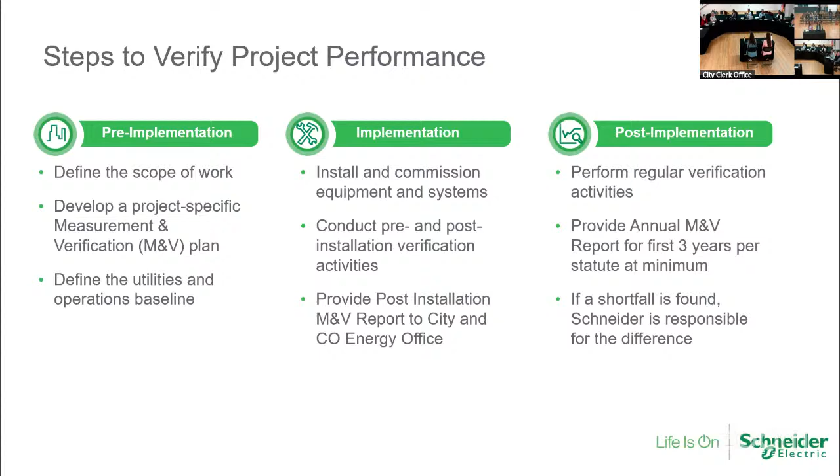And then the post-implementation, that's the longer term M&V. As we know, there are 3 years of statutory requirements through the state. So the first year, we typically make 2 visits to measure and verify what's happening. And then at the end of year 2 and year 3, you'll see us for 1 visit. And that's when, if a shortfall is found, then we would be responsible to help you make up the difference and also correct whatever issue caused that shortfall in the first place.

So there are lots of different reasons why we would measure and verify a project like this. Obviously, it is statutorily required, but that's not the only reason we do it. We want to make sure that we're sharing an appropriate amount of risk with you so that that creates a strong partnership and makes sure we're working in your best interest. We want to make sure your savings guarantees are met as designed.

And over time, it could also help us identify potentially additional savings in your facilities or in those systems to create further efficiencies, more savings, and also just help Roy and his team from a maintenance and operations perspective keep an eye on what's happening with those systems.

And we want to reduce those uncertainties to reasonable levels. I know there's a lot of uncertainty with who knows what's going to happen in 20 years, especially with recent events that have happened over the last week. It's hard to know even what's going to happen a couple months from now, but we do have some ways that we can reduce uncertainties with our measurement and verification so that you can have the confidence this project is going to pay for itself.

So when we're building a measurement and verification plan, we want to make sure there's, of course, an element of accuracy, but we want to balance it with the cost. There is a cost for us to do the measurement and verification, and there are other protocols that can be somewhat costly or just simply don't make sense for the scope. So we want to make sure we pick the appropriate one, and we'll go over what all those options are.

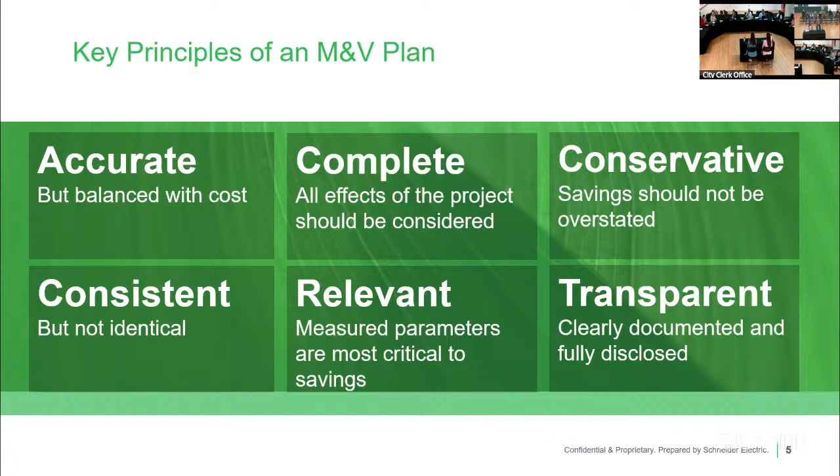So I won't go over all the statutory requirements. I believe I've covered these in previous meetings. If you have any questions, you are more than welcome to reach out to Charlie or Oren from the Energy Office. But we want to make sure that obviously the statutory requirements are covered.

So this language and all of the requirements are listed in your contract language. So we'll work with Denise and Jeff to make sure this meets statute. But we're going to be putting your M&V plan into the contract so we know exactly what's going to happen, at least for that statutory period of the first 3 years.

So looking at the timeline specifically for Manitou Springs, when would the measurement and verification theoretically kick in? So we're expecting that construction would be done by the end of this calendar year. So sometime starting early 2026, the construction would be complete. That's when we consider that the year 1 start. So as soon as everything is installed, we're going to be doing our baseline measurements and making sure everything was installed properly. We'll let that go for that first year and give you a couple visits and provide that report.

In 2027, that's when the year 1 reconciliation would happen if there were to be a shortfall, and then year 2 would begin, and so on and so forth.

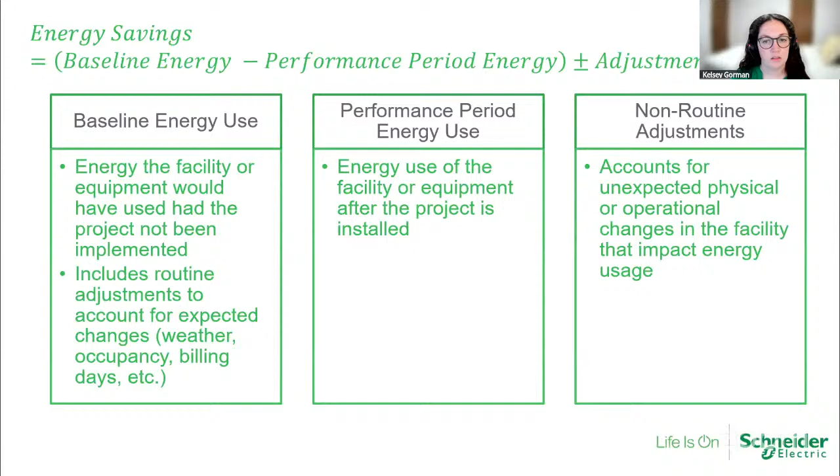Another part of this project is a little different in how we measure, and that's the water revenue generation. Since the water usage itself is not being impacted, we're not going to use the same equation as the last slide. We're only impacting the accuracy that the meters are reading.

We're not measuring individual use of water like longer showers, shorter showers, gardening, etc. The way we calculate the revenue increase is by taking the baseline gallons of water consumed by the city and holding that steady, because we don't want anything influencing our calculations except what we did, which is increase the accuracy. We apply that baseline water use and ask: if you'd had the more accurate meters we installed, what revenue could you have been generating? Then you subtract the actual revenue generated with the old meters, and the difference is your revenue generation.

The International Performance Measurement and Verification Protocol, abbreviated IPMVP, is the gold standard when it comes to measurement and verification. I'd venture to say all ESCOs use it because it's just the standard for measuring and verifying everything. The Colorado Energy Office is also going to require anyone doing M&V or an energy project with you to use it.

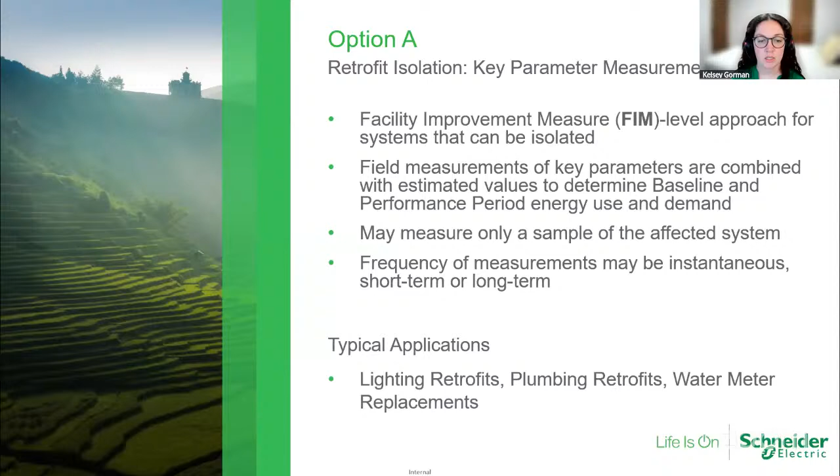Thank you. I'll say one thing about the warranty - I apologize that information was not readily available at the last council meeting, so I made sure that was included in the packet this time. And I pulled out the two most important pieces of information as supplemental slides for your reference.

So the manufacturer does guarantee an accuracy of plus or minus 1.5% for the full 20-year useful life cycle of their meters. So we're pretty confident that it's going to stay within that range. And if it doesn't, then you do have recourse with the manufacturer under warranty to get that corrected.

The advantages of option A, I've kind of discussed those already. It's very cost effective. It's great for scope that is not going to be influenced by other things, like lighting — the heating and air conditioning in your building will have a very minimal effect on it. So we can safely isolate it from the other energy users in your buildings and measure it with option A.

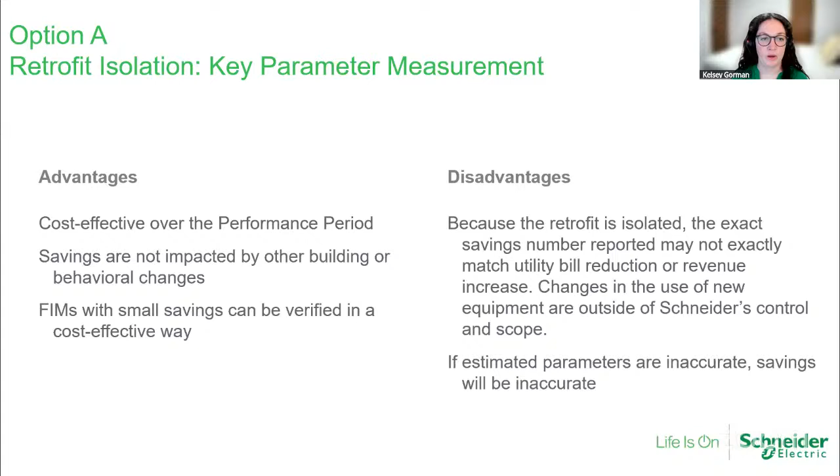Yes, so that would just mean that we're measuring only the retrofit, or facility improvement measure, or scope of work. I'm sorry I'm using so many words to say the same thing, but we're only looking at that one scope that we're implementing — that's what retrofit isolation refers to. The key parameter measurement part is what you mentioned about taking a random sample of measurement.

So retrofit isolation means, for example, we're installing HVAC, windows, and lighting in this room. If that were the case, then we would not be looking at other renovations you would be making in this area. We're only isolating our savings to the scope that we are installing. Does that make more sense?

How does that affect the rest of the project, like the water meters? Is that included? Yes.

You test a few of them? We can talk more in a moment about how we go about our testing and verification upon install, but we're going to be verifying every water meter as we're installing it, and then post-install creating a report showing the accuracy, making sure it's actually working, and providing that documentation to the city. Thank you. You're welcome.

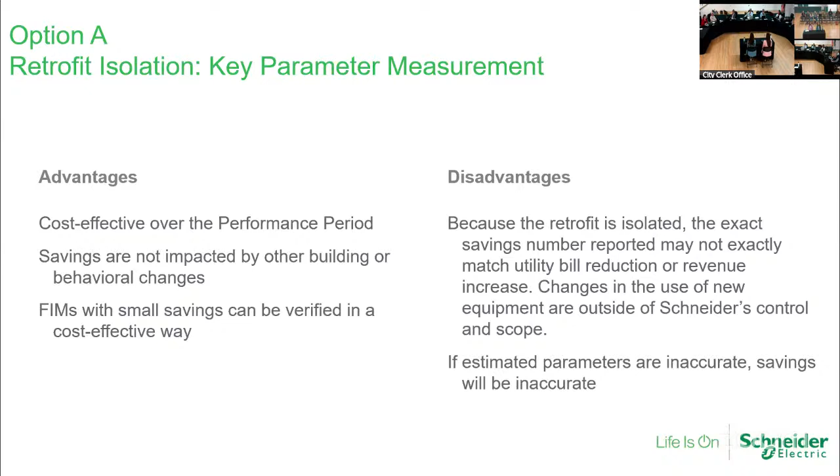So when looking at the scope of work for this project, I try each one on with a different option and think about: is it a good fit, is it not a good fit, and why? I wanted to lay that out clearly for everyone. We'll go scope by scope — I'm not going to do this for every option, don't worry, I know this is a bit lengthy. There are supplemental slides in this packet where you can look at my reasoning for the other options, but I wanted to spend more time on option A since that is what we're recommending.

Lighting is a great fit. If you read the IPMVP, if you're looking for some light reading, it actually recommends option A for lighting as the standard approach, because it makes sense almost all of the time. So that would be a perfect fit here. Now, whether or not the savings are large enough to justify this approach, we'll have to weigh that, because the savings are pretty small compared to what it would cost to measure and verify them.

That's something else that needs to be considered: are the savings going to be smaller than what you're going to pay for us to measure them? Does that make sense? Typically, no, it does not. But if you look at lighting as a general scope item, option A is a good fit. Lighting energy use remains steady — it's not influenced by the seasons. The lights go on and they use a certain wattage; they go off and they quit using wattage.

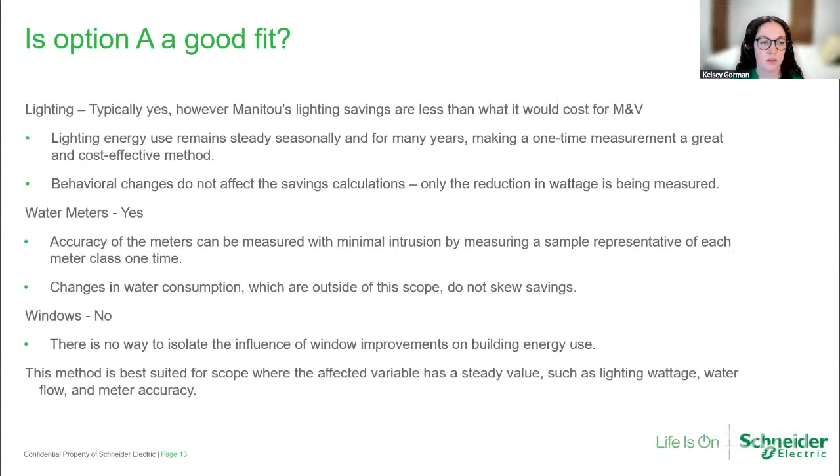Then we would apply a contract utility rate to that, so that, as has been mentioned before, if you change your rates, if you get a different utility rate, that's not something that we're influencing, and so that's not something that we want to unfairly measure. So we're going to stipulate a utility rate to be used, and that will all be in the contract. That will all be approved by the Colorado Energy Office as well.

And we do have projected utility rates from Colorado Springs Utilities for the next 5 years. So we actually took an even more conservative baseline than those new utility rates that are going to come into play for the next 5 years.

For the option A water meters calculation, it's a little bit more complicated than just one minus the other. So in general, we'll measure the accuracy of the existing meters - that's already been done. That's what we based our calculations on, and that's why we can be so sure of our projections of how your savings are going to look.

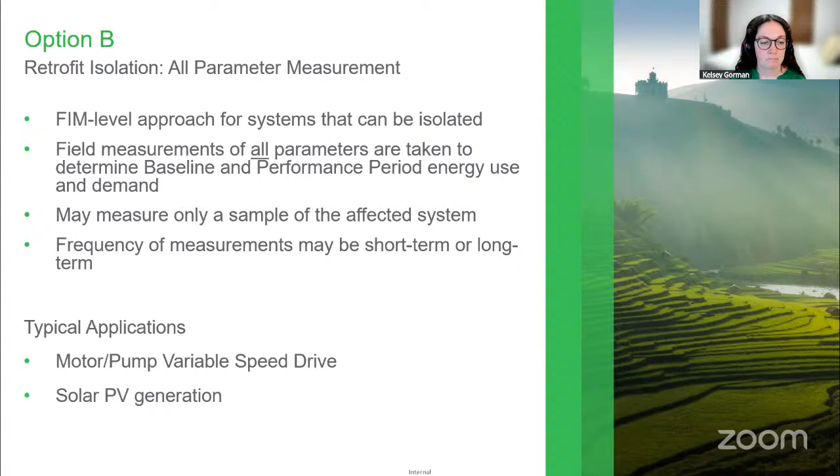So when I think option B, immediately my mind goes to solar generation or motor upgrades like in your fans. Option B, I would say, is not a good fit here. Great fit elsewhere, not here. For the lighting, I don't know if you'd need to rewire all of your electric, but it would cost so much to measure this that it would not be worth doing the project. This would really not be a good use of money to use option B for lighting.

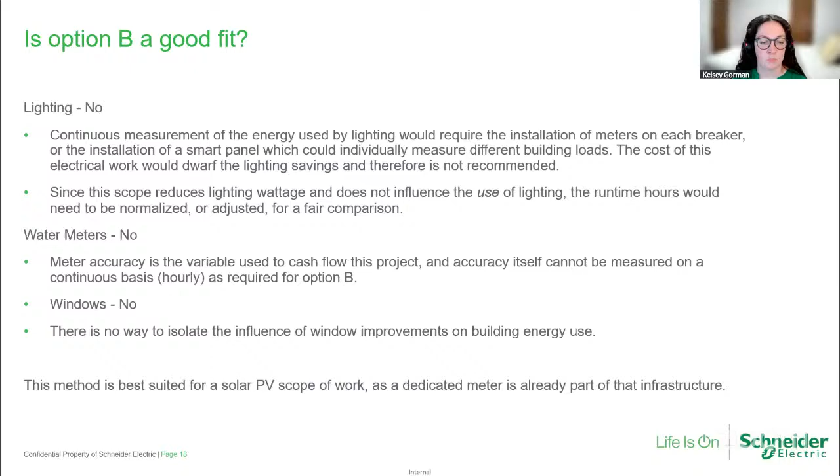Also, I've personally never seen it done. It's not good industry standard practice. It does require full energy metering instead of just measuring that one impacted parameter. So not great for lighting. Same for water meters—you can't measure accuracy like that. The meter has to be physically tested at a facility, so it can't be measured continuously. And then for windows, same point as with option A—there's not really a way to isolate the energy saved by upgrading your windows, because they're not drawing power from an outlet. So it's a bit more complex than that. This method is best for PV, which already comes with its own meter and it's kind of plug and play.

All right, if there are no more questions, I'll keep rolling on to option C.

So option C is probably what you would first think of when you ask yourself, how am I going to measure the energy impact from Schneider Electric? If I had to do that by myself, what would be my first thought? At least for me, my first thought would be, well, let me look at my utility bills before the project and then after the project. That's pretty much what option C does. It's looking at your whole facility at the utility meter level, looking at everything that's going on in your facility.

This approach is great if you've got multiple scopes of work or facility improvement measures, especially things that are going to change seasonally, like building automation that controls your temperature set points and the schedules your building is running, or that in conjunction with lighting, mechanical, and windows. If you had a bunch of stuff going on and it saved a large amount, then this would be the option to use.

So savings, we typically look for savings that are at least 10% of the baseline, and this allows us to know that what we're seeing on the utility bill has got to be from the work that we did. It's not just noise or small things going on in your facilities that are unrelated to us. It helps us be certain that what we're seeing is the scope that we implemented.

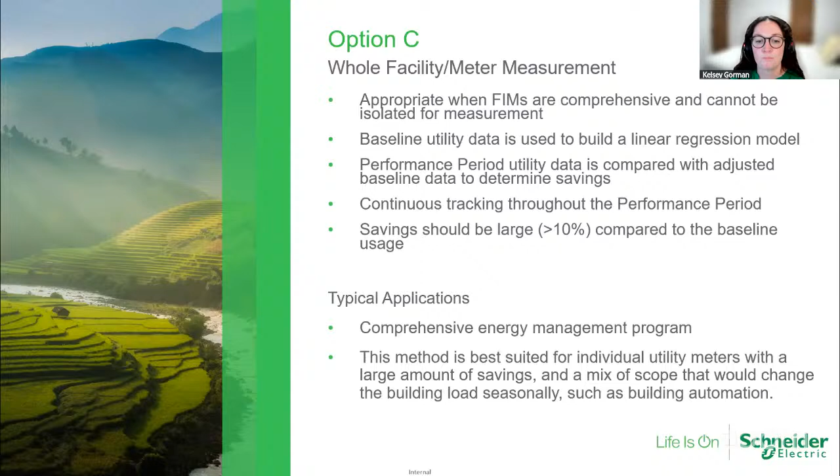As mentioned, there are supplementary slides later on where you can see why I would say that option C is not the choice here. Number one, savings just aren't large enough for the energy efficiency side. And number two, it requires continuous measurement, which, as mentioned, is not possible for accuracy.

All right, option D, this would be a calibrated simulation. This would be if you put option C into a computer model, you can think of it that way. So we're also looking at a whole building, multiple scopes of work, all interacting with each other, changing seasonally, but we're doing it in a model instead of analyzing the utility bills and doing all the math behind the baseline to get it steady with the conditions of today. So this can be a more cost-effective way if you wanted to do option C and you had the scope and savings that could justify it.

This can also work for buildings that don't have a baseline. That's not really relevant here, but it's just a different way for if you really want to measure something and nothing else will really fit. Can be kind of a workaround. So it's best suited for meters that we would just love to use option C for, but that don't have quite enough savings to justify that.

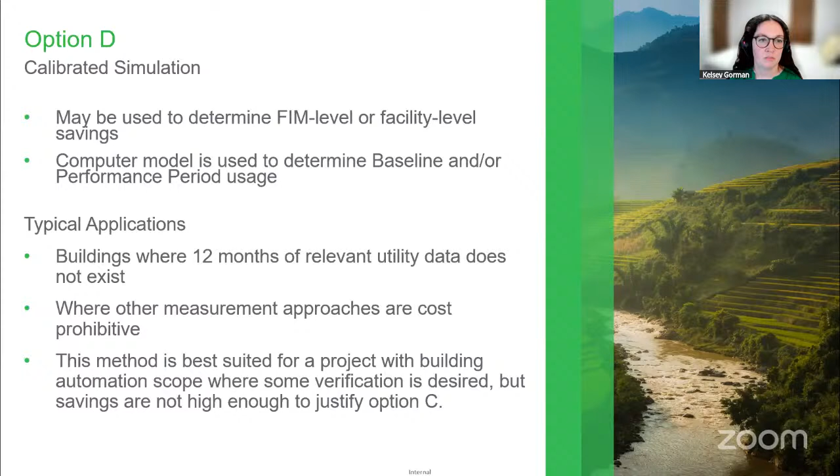Okay, so the proposed M&V plan that we have put together for you, we did evaluate lighting to see if option A would make sense, but overall the lighting savings annually came in about $3,800 or $3,900 a year. It's fairly minimal in the grand scheme of the entire project. So we thought rather than eating up your minimal lighting savings with additional work and reporting on our side, we'll just let you keep those in your pocket. We're pretty confident, I mean, LED lights are fairly simple and they're really efficient compared to what you have here. So we're pretty confident you're still going to get those savings, but we would not recommend that we add these to our measurement and verification plan just due to the cost and resources required.

For windows, we talked about how it's hard to measure the energy impact of those. We do know it will help with comfort and it will eventually help with things like energy efficiency, not letting hot air leak outside into the cold. So we're not going to measure the window impact necessarily, but we do expect that you're going to see some benefits from those.

For HVAC, we're actually adding an air conditioning and heating unit where it didn't exist before. So that actually negatively affects the energy savings impact of this project, and we certainly don't want to take any savings away from you. So just know that if we do put the HVAC unit in here, you have air conditioning where it doesn't exist now. Your utility bill may be a little bit higher in the hotter summer months, but this is also a benefit for being able to rent this space out year round and have everybody be more comfortable. So we wouldn't be measuring that necessarily.

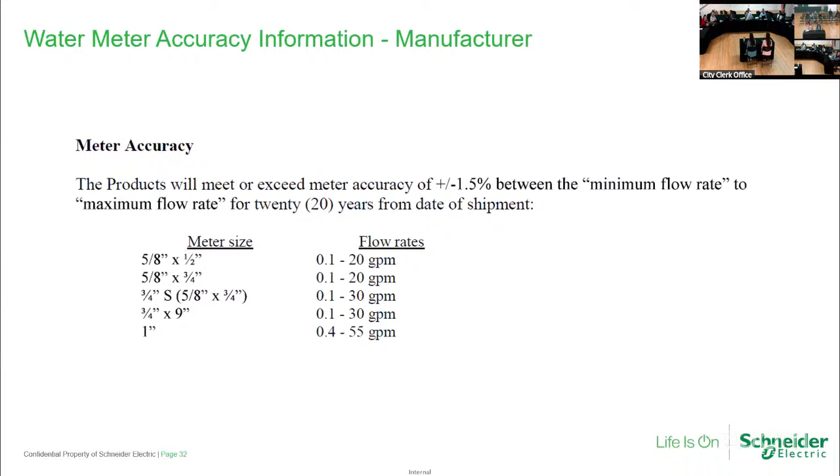But it is the cost to the city. The city must remove the defective device, even though it's defective on the manufacturer's side, and the city must pay for removing the defective device and also installing a new one. So does Schneider take into account those costs that we bear for having to pull out and install a defective device in our overall cost savings?

No, we do not account for that. Okay, so that's just a cost the city bears with going with this. Of course. But, you know, after the initial installation, especially that first year, we're going to be doing a deep dive on everything during our first year of measurement and verification. We'll be able to tell very quickly if a meter's not operating properly, and we'll be able to assist the city with that warranty claim.

However, the labor would be on the city water department to do that change out. What I'm requesting of the city, if that does occur, I want to know what that cost is. I want to know if we have to pull out and replace a meter, I want to know how much that costs. Right now you're saying it costs $12,000 a year to maintain the system as a whole, so I'll be curious to see how we factor that into our overall savings. Thank you.

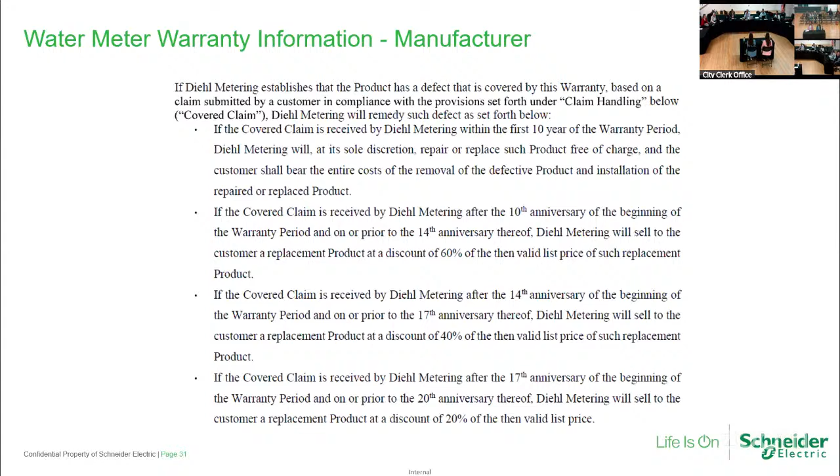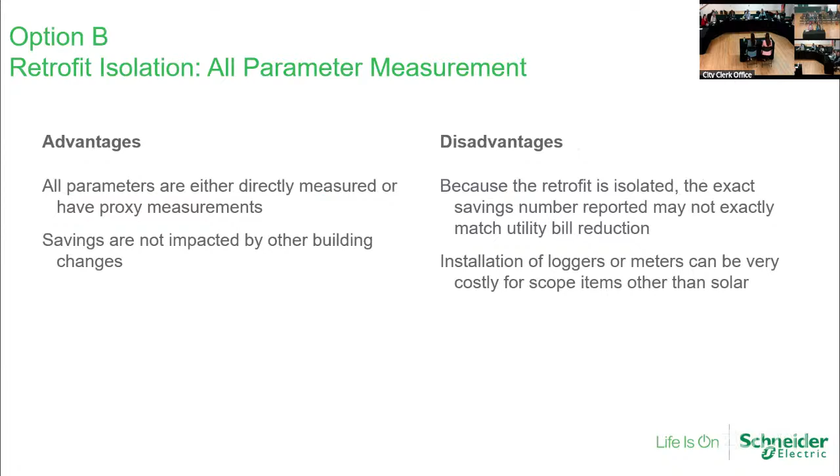Julie? Can you explain, under maintenance and operating savings, under the proposed M&V plan for Manitou, the responsibilities section says that we would have to come to a mutual agreement on M&O savings, usually 3% of construction cost. Can you explain that?

Yes, so as of now, and Tyler correct me if I'm wrong, we've included $10,000 of annual maintenance and operational savings in your cash flow. And again, there's $12,000 a year being spent just on parts and materials to replace failed meters, so we've taken a very conservative approach to that. Typically the industry standard is 3% of the total cost of construction, but we felt that was a bit inflated for Manitou Springs, so we kept it much more conservative. That can also include things like fuel cost savings by not having a water meter employee driving around to pick up meter reads every month, and the wear and tear on those vehicles. We won't necessarily need to do that anymore, so that's a maintenance and operating cost savings.

So we save $10,000 and how much do we pay you? The $10,000 in savings from maintenance and operations savings is essentially costs that you're avoiding in the future by having a working system, so you don't pay us anything extra for that. That's just a cost savings we include, like the energy savings from the lights and the additional revenue from the more accurate meters. So when it says come to mutual agreement on M&O savings, usually 3%, those are just your estimated savings the city would save on all of these projects, nothing to do with a payment to your business. Is that correct?

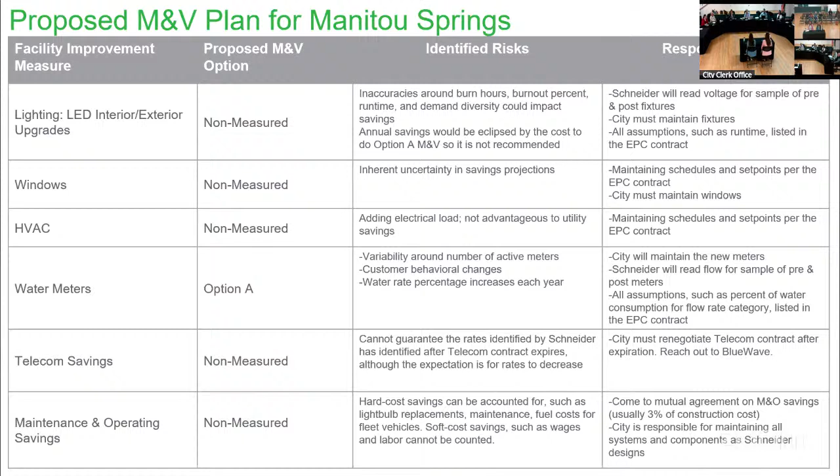Our next item is a presentation and discussion on improvement options for the Ruxton Corridor.

This is an update from February 11th. We had a work session then, and so tonight we have Glenn Ellis from JR Engineering, who's going to brief us on this.

Mayor, I'll do a quick introduction. As you know, we presented this about a month and a half ago, and you had several questions. We wanted to bring those answers back. Glenn has been our engineer on this project since the beginning, so he and I met, he watched your presentation, listened to the questions, and has some additional information. One thing you asked for was the itemized cost of each of the options, so we were able to provide that for you. Glenn did some estimating for that. So with that, I'll turn it over to Glenn.

Thank you, Denise. Can you hear me pretty good? Yes. Generally, if you're about 3 inches from the microphone, that works pretty well.

As Denise said, I'm Glenn Ellis with JR Engineering. I've been the project manager for this project probably 4 or 5 years now, back when Dole was working with the city, so don't hold that against me since I've been on this almost from the beginning of design. But as has been stated in the past, there's a lot that has gone into this project, a lot of complexities, lots of things to think about and discuss.

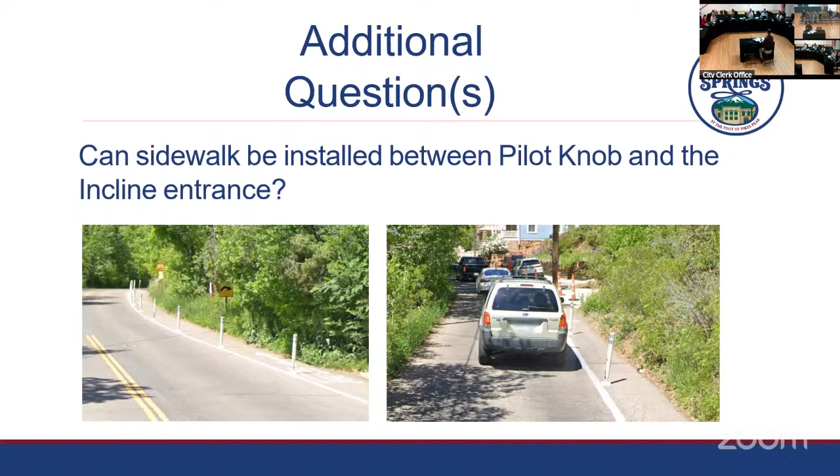Then on the section on the right, which is the one-way, that roadway is very narrow, about 17 or 18 feet wide. The plan indicates there would be a colored section of concrete to delineate the roadway from the sidewalk, and then there would be a 5.5-foot sidewalk. It would have no curb and gutter because of the fire requirements.

You need to have an unobstructed area of at least 20 feet. That allows if there's a fire truck operating on the side of the road at a fire hydrant or whatever, there's still a passable area adjacent to it. So obviously we're restricted currently as it stands, but adding that curb and gutter in that section would restrict that area even more. The plan, even from when this corridor was studied many years ago, that exhibit I show comes directly out of that plan, and that's really the plan we would be moving forward with.

It's a narrower sidewalk, but you'd still have a little bit of room if people wanted to get on the colored area. But that colored area is really delineated from the roadway. So I've indicated there with some lengths and whatnot.

The sidewalk itself on that section would also have to be thicker than standard sidewalk thickness. Standard is 4 inches; this would be 6 inches. That's just because you'd have vehicle traffic, potentially the fire truck driving on it, and you wouldn't want it to be thinner and potentially break up.

So with those costs and those dimensions, I've got an estimate of just under 200,000 to do that. You'd be removing the asphalt, and you'd remove some curb and gutter and sidewalk that's on the south side near Pilot Knob.

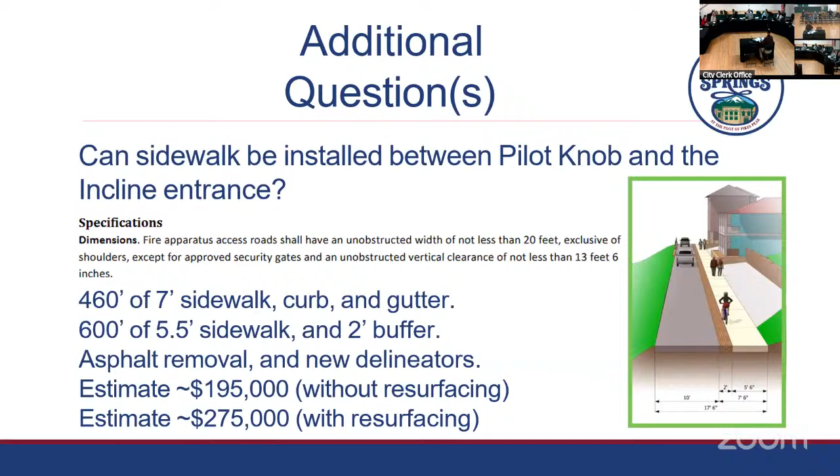Now, when it went out to RFP for engineering, Dole had put the western terminus at the bar, at the hydro plant, the access to the bar parking lot. That was his interpretation of the COG. It could be interpreted as stopping short of the COG, but that's the road he took.

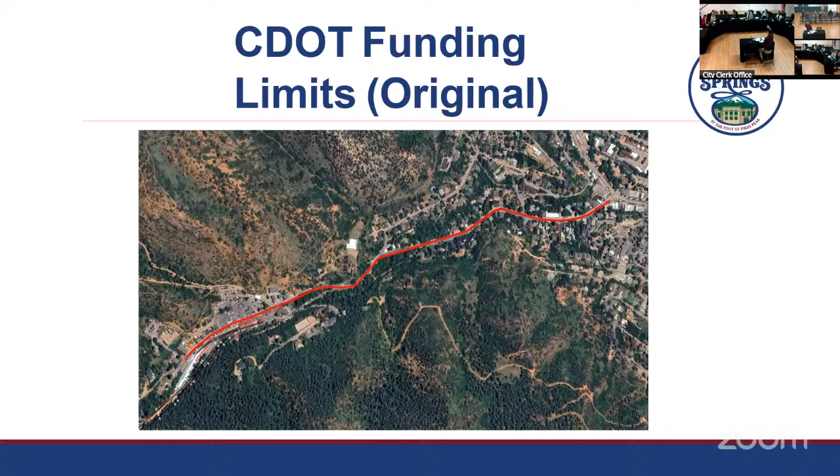So when we prepared our proposal and cost estimate, those were the limits we worked from. We did enter into a contract with the city to provide preliminary design from Manitou Avenue up into the hydro plant. Right now, based on some adjustments and direction we were provided, the scope changed to only provide design from Hydro Street to New York Avenue, to align with CSU, which was already in the process of designing the undergrounding from Hydro to New York to kind of align with the COG's improvements that they had made.

So that was the revised scope. Currently we have 50% design ready to go to CDOT for review, which includes new curb, gutter, and sidewalk, new water, new sanitary, and a new storm sewer system, new asphalt paving. The difference between this new asphalt paving and the other asphalt paving in the other estimates is this pavement would rip out all the existing, go down to the subgrade, recompact and stabilize the existing subgrade, and then put new asphalt paving on it, underground all the electrical, and add street lighting. Our current estimate at this point is $8.25 million.

As you see in that table, discussed last time around, the city received 4.4 million of federal funding with a city match of 917, so 5.3 million is available for the entire corridor. As you can see there in yellow, you have currently about 4.8 million remaining for design and construction of the project. So I just kind of want to give a little background on that.

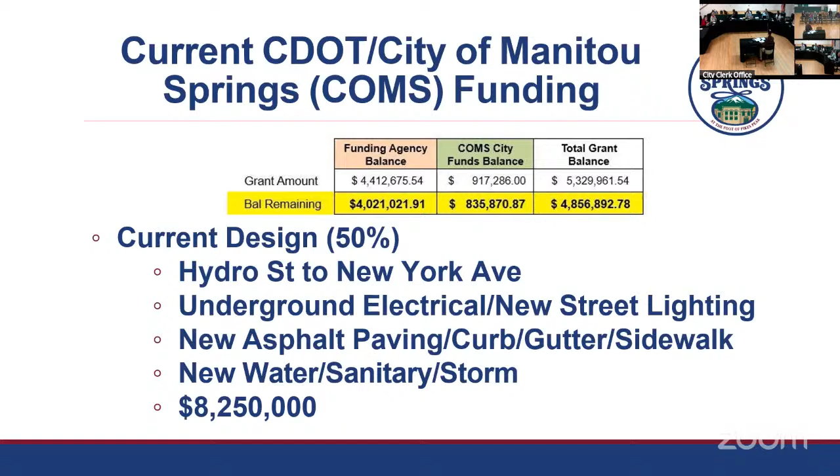Okay, so now I'm going to go into the options. I know you've already heard options A through D on the prior presentation, but you have those same options here plus a couple other ones. The A through D are the same as what Andrew presented. I'm going to go through them, maybe provide a little additional information, but nothing has really changed in terms of the limits, the work being done.

You will recognize that there are differences in the cost, and I can give an overview of that, but Glenn, I think it would be helpful just to touch briefly on those first four options, the ones that Andrew had already presented, because I think we'd benefit from a refresher. And then if we have gaps, we'll ask questions.

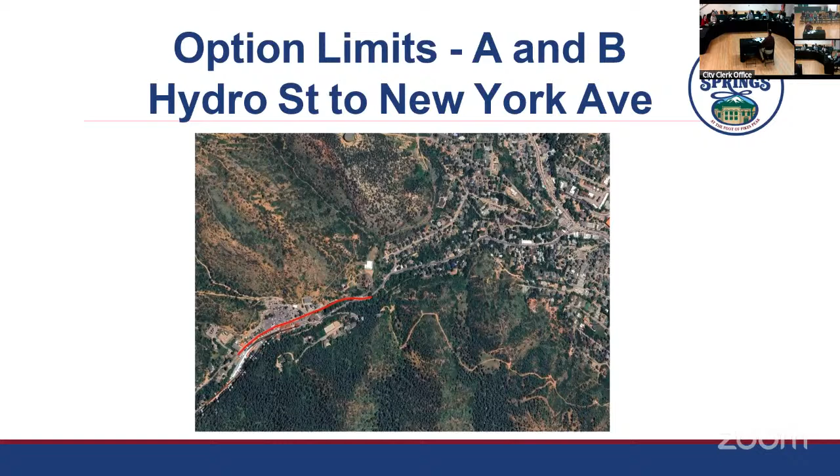That project for option A, from New York Avenue to Hydro Street, would be to underground the electrical and the telecom. We would do a mill and overlay, so that's just removing maybe 2 inches of asphalt, putting 2 inches of asphalt back, structurally lining the sanitary sewer system, and adding some walkability enhancements, really just signage and replacing some of those delineators out there.

Adding new streetlights that would be coming with the undergrounding. There would not be any water or any storm sewer improvements at all. You'll see in some of the other slides that there are some of those, but I wanted to highlight that there's none of those on there. So with the city's aging system, those improvements would not be made.

So there's the potential that a year after, or even 2 months after the project, you could have a water main break or something like that, just to highlight that. And so that's estimated at 4.9 million. So because we pulled out the water, we pulled out the storm sewer, we modified the asphalt work, it brought the cost from the original 8 point whatever million that we had currently estimated down to 4.9 million.

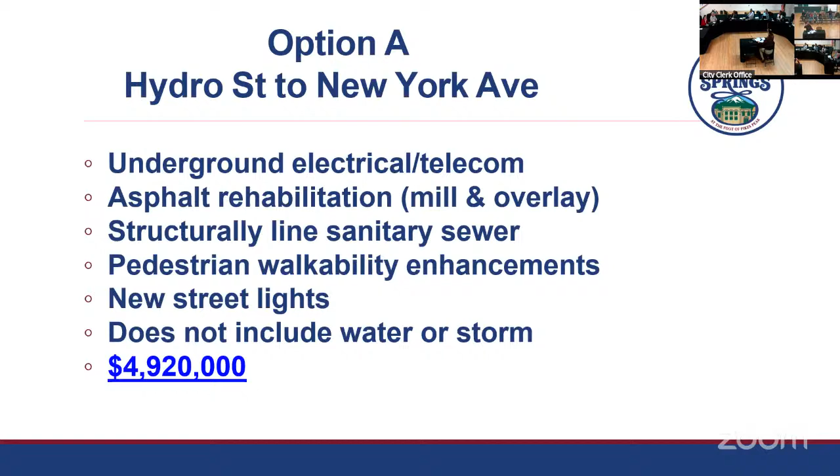And then, so I generated some pros and cons, and obviously there could be some others just based on perspective and in the context of the improvements. But obviously the pros, you're getting your underground conversion, which I know is a high priority for the city. You have an upgraded sanitary system, you get new street lighting, new pavement surface, and it fits right within the existing budget. I mean, it squeaks right under there.

The cons are that it only provides a benefit for that COG in the incline area. The remainder of the corridor remains as is, so there's no improvements east of New York Avenue. There's no new storm or water systems installed. We would have to revise some of our design that's already been done to remove some of the elements we designed in there, such as the water, the sewer, the curb and gutter and all that. We'd have to pull that out of the design and tie everything back into the existing grades that are out there currently.

So those are a quick overview of the pros and cons. And like I said, I touched on the cost. Your packet should have the actual cost estimate of how I've developed those costs. If there's any questions on the cost or any of those elements, I'm open at this time for option A.

Any questions on option A?

I'm just assuming that all of these cost estimates are pre-tariff. I mean, this could really change. Yeah, I haven't been involved yet with projects that have actually gone to bid. It's a short period, so yeah, it's hard to decipher what that factor could be.

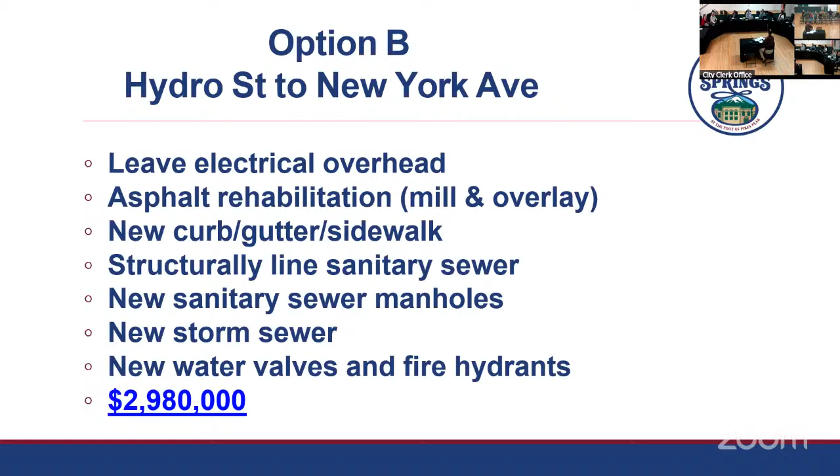So jumping into the pros and cons, I mean, a lot of these are going to be the same throughout all these options. You've got your upgraded sanitary sewer, you have new water valves, new hydrants, you have new pavement surface, new curb, gutter and sidewalk, and new storm sewer system.

And this one clearly fits within the budget. The cons obviously though are you're only benefiting a select area. The remainder of the corridor is left as is. The poles remain, although there may be the possibility as we're going through design of looking at each one of those poles individually and saying, hey, can we move this one out of the way so that we can get our sidewalk or whatever improvement in there? There would be a cost associated with that, but we'd have to work through that.

Right now it's really a concept that hasn't been vetted through or discussed too deeply with CSU. We would have to revise our existing design again, and there's no new water main. So it really depends on your priorities—some of these cons may not really matter that much. If you want a new water main, then it would be a con. If you're okay with what you've got, then it may not score that highly on that con list.

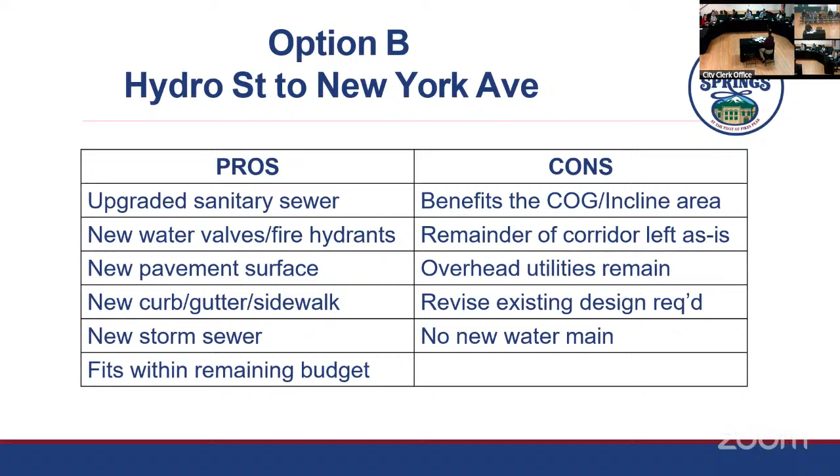Any questions on B? Anything else? Okay.

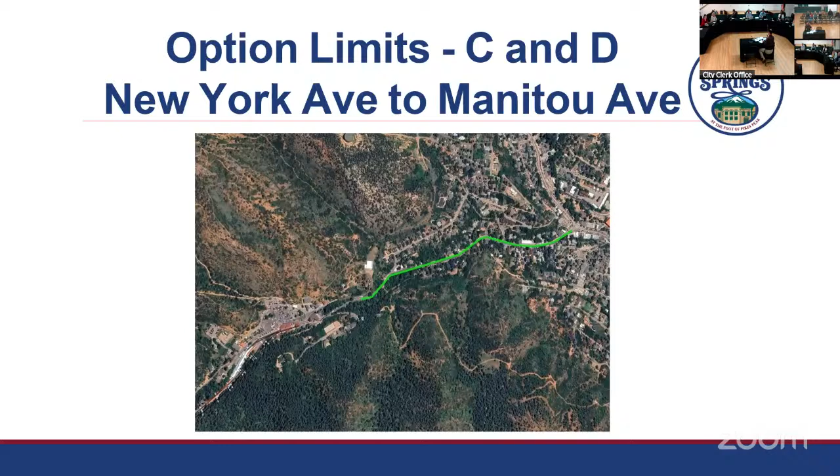Options C and D are from New York Avenue to Manitou Avenue, and that really just closes the corridor limits. They're listed again as C and D just because one's got the undergrounding and one doesn't. Option C, we're kind of flipping this way—we're leaving the overhead along the entire corridor. We're milling and overlaying, and we're adding curb, gutter, and sidewalk.

We're doing the sanitary sewer lining again, and replacing the sanitary manholes. This time we're leaving the storm sewer system in place, but only replacing the inlets—those have deteriorated over time, so we're going to replace those. And then at selected locations, we would add water valves and fire hydrants. That cost is coming in at about $4.4 million.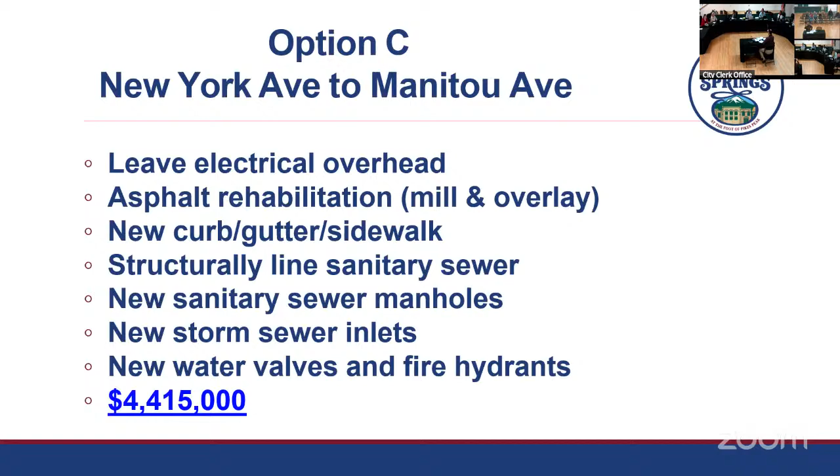Pros and cons: you get an upgraded sanitary system, new water valves, fire hydrants, new pavement, curb, gutter, sidewalk, new inlets, and new manholes, benefiting a good majority of the corridor. The cons are you still have the poles in the way that we'd have to work around, and you would need additional funding—which I think might be left over, because I went through multiple iterations on these cost estimates, so I just didn't update that con.

So the 4.4 million does fit within your current budget, so we can strike that actually. We would have to do design—no design has been done yet on this segment at all, and you would not get a new water or storm system through that corridor.

Any questions on C? So that includes that raised sidewalk from Pilot Knob up to New York. Yes. Okay, thank you.

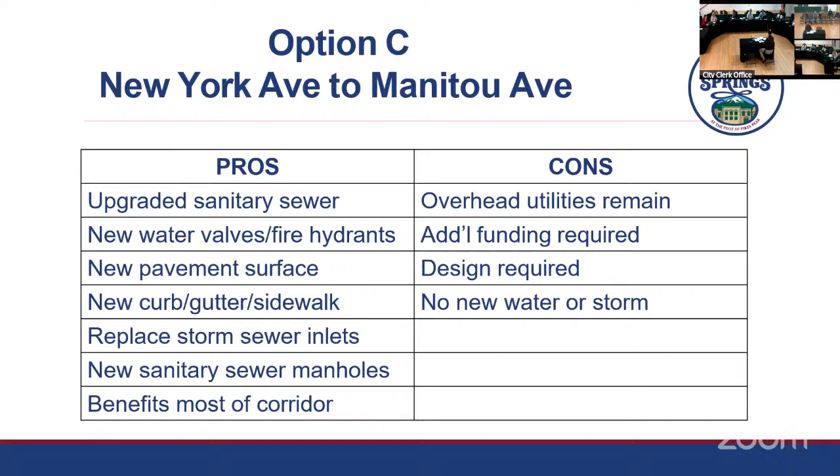D is undergrounding the entire corridor from New York Avenue to Manitou Avenue. Andrew had about 4 to 5 million for the undergrounding of the electrical, so I kind of split the difference and put it at 4.5. I added about $1 million for the telecom, and really that's just my best guess. We'd have to have some conversations with those companies—I'm sure they do budgetary estimating and should be able to provide a cost, but we just didn't get into that at this time.

And I've got 2.5 million to do the secondary connections and the easements, associated with a maximum of 100 properties out there. I tried to tally it, but there's wires that go everywhere, so you really can't follow every one of them. There could be a wire that goes 2 properties deep—I really don't know. That's without really working with CSU and doing an analysis of every single property, walking it and looking at the needs.

The one key on this, and I had to get confirmation with CDOT, was there was talk last time about using funds just for the undergrounding as the priority. But because of the funding source, we could not use this money solely for undergrounding—it has to be associated with a surface improvement. So if you're replacing the sidewalk and the pole's in the way, the pole can go underground and the project will pay for it. But if you're milling and overlaying and not touching anything that would impact the poles, then it would not qualify.

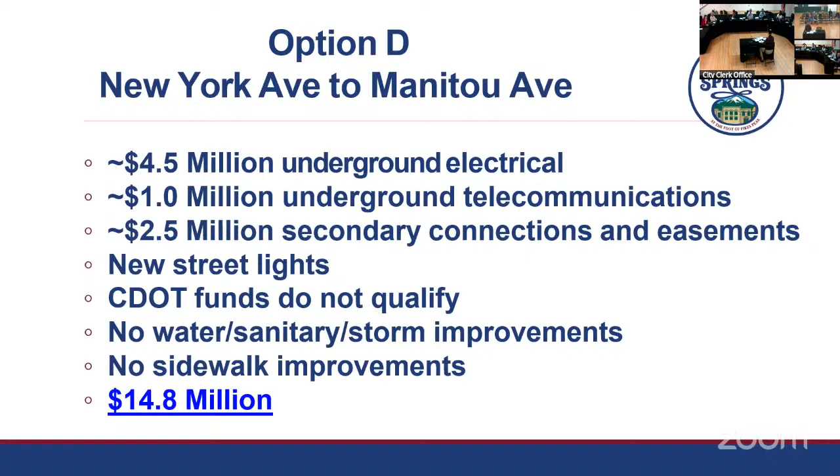The pros and cons on this one are: the pros are you're undergrounding, you get new streetlights, and it benefits most of the corridor up to New York Avenue. The cons are there's no other improvements being made, and you can't use CDOT money to fund it.

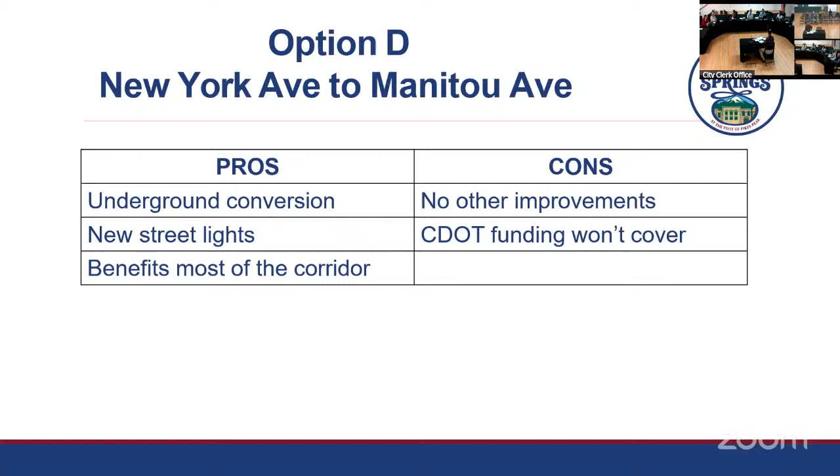All right, if there's no questions on that, I'll jump in. The next 2 options are really... sure, Julie, go ahead. That's fine. Go ahead. This, I just don't know.

If you're replacing a sidewalk and installing the gutters, does that mean you have to also do an asphalt resurface? No, you don't have to.

And if we just replace the sidewalk, is that something that would give us CDOT money without resurfacing? Yeah, because it accomplishes the goal. CDOT probably has a couple ways they can interpret the scope of the project. When you look at the title of the project, it says Ruxton Avenue pedestrian and drainage improvements. That's the title, so the scope they'd expect is that you're going to make improvements to the sidewalk. And naturally, when you replace a sidewalk, they've got inlets in there, the storm sewer systems, so you're going to replace those at the same time. So bare minimum, those are really the crux of the project. The roadway portion aligns with the surface transportation component of the program itself.

So does that mean we would have the option under option A of undergrounding, curb and gutter and sidewalk, and no asphalt resurface? That would be one of our options if we wanted to apply that extra money for asphalt resurface towards something different. Or does that not really make sense? Can you walk me through that? No, I mean, you can do the project without doing this resurfacing.

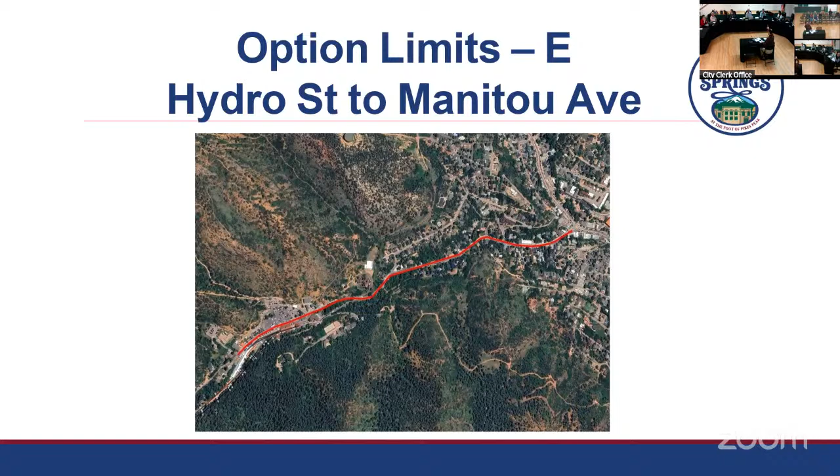Okay, so I'll continue. Option E really is the entire corridor, so it aligns with the scoping terminus that was originally part of the funding allocated. The improvements are associated with what's listed here: we would leave the overhead in place, we would mill and overlay, so the components are pretty much the same—just some of the limits are changing. New curb and gutter and sidewalk, structurally lining the sanitary, new sanitary manholes, new fire hydrants and water valves, and a new storm sewer system. We've got that at about $7.9 million. We scaled down the scope on the 4 other options, so I basically took that same approach and extended it for the entire corridor, which puts us at 7.9 million.

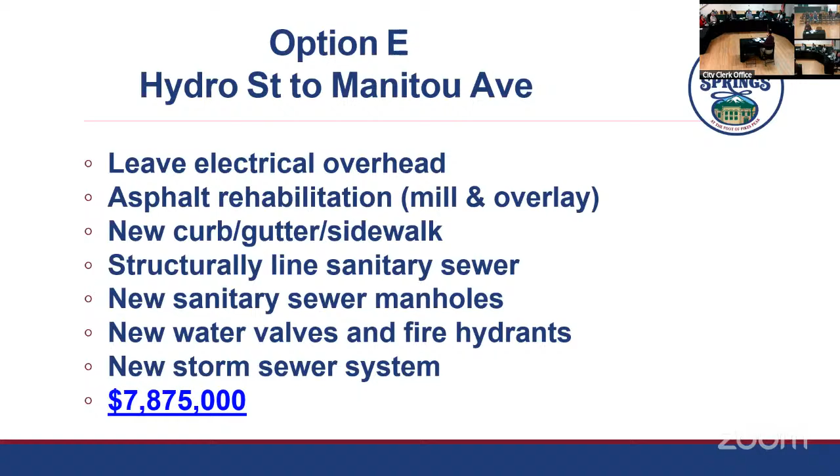The pros and cons are going to be the same as those other options. The only difference is on the pro side—your entire corridor is covered. You're not focusing solely on one segment of the populace up there; you're covering everybody out there, and everyone will feel happy and smiley. Does that include sidewalks? Curb and gutter too? Yeah, new curb, gutter and sidewalk. Yep.

The cons would be the overhead poles would remain, and what we'd have to do during design is look at which poles we can move, and where we can move them to, so we can still have our sidewalk and not have a pole in the middle of it. Because having a pole in the middle defeats the purpose of making these improvements.

So we would have to work with CSU. Some of these would be easier than others. If it's just a pass-through pole where the overhead lines just go from downstream to upstream, and it's just there to carry the sag, that probably could occur fairly simply, though I don't know the cost.

I'm not an electrical guy, but as opposed to that, the maximum case is if you had transformers on a pole that then feed streetlights or homes—relocating one of those poles would have a significant cost relative to other pole relocations, and you'd have less of a confined area to move it to. It might even take two poles to replace just one. I'm speaking from limited experience, but that's my understanding of what we'd need to work through with CSU.

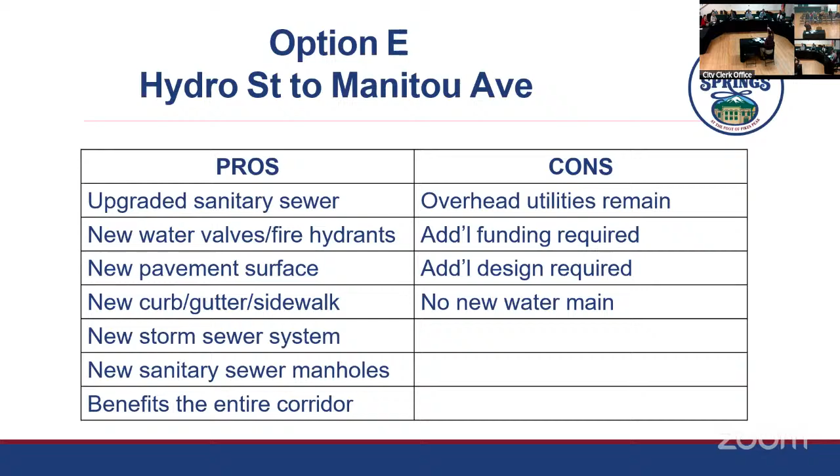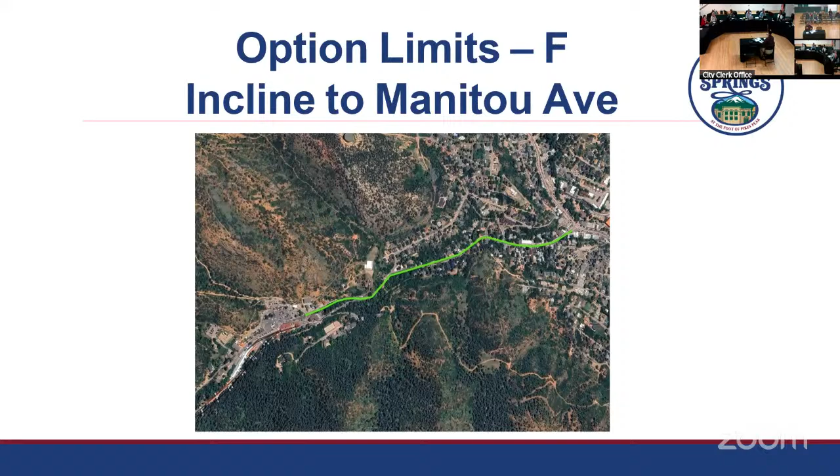Okay, so option F is from Manitou Avenue up to the incline. Again, it's got the same components we've talked about on all the others: overhead remains, mill and overlay, lining your sewer, new manholes, new storm sewer system, and new water valves and hydrants. That's coming in at about 5.9 million.

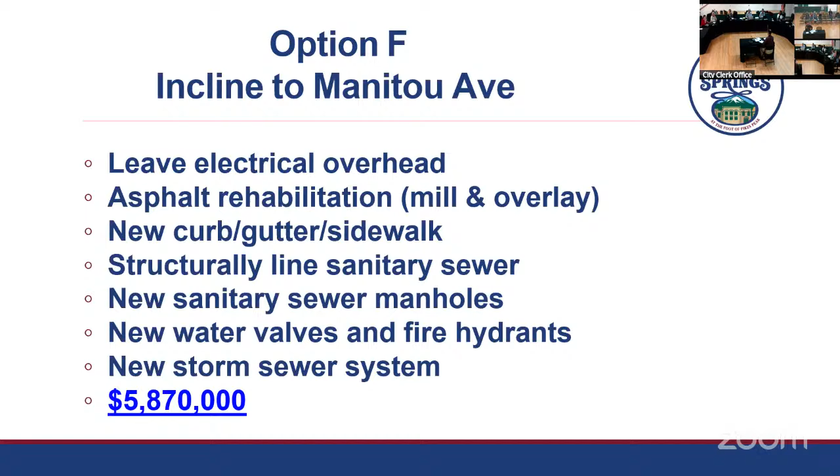And then the pros and cons are again the same. It benefits the majority of the corridor minus the cog. I'm trying to think if there's anything really different about this one, other than just the limits of the project itself and being a little less expensive to do.

Go ahead, Julie. What's the difference between new storm sewer and storm sewer inlets? Sure—when we just replace the inlet, that's the drainage collection at the curb and gutter. Water comes from the gutter, dumps into that inlet, and from there goes in the pipe into the creek. That's just replacing that box, the inlet.

The system is the additional piping that connects the inlets together and the manholes—that's a new system. Okay, and I know Nancy had a question. That was my question. Oh, okay, thank you. Which of these categories would apply to when you're lining the sewer line? Was that the new storm sewer? That's the sanitary sewer. Oh, there it is. Yep, thank you—it's been a long night, a lot of information, I get it.

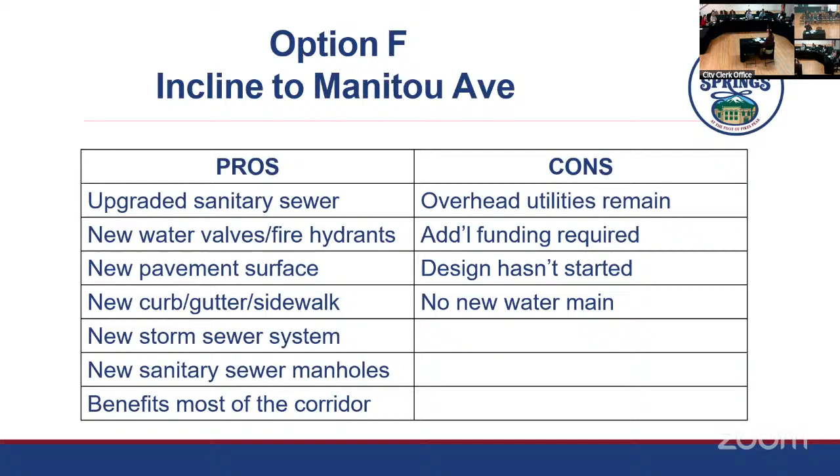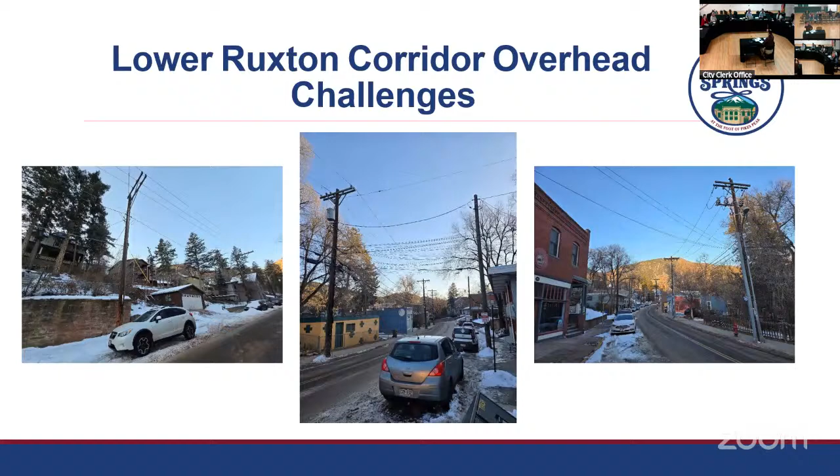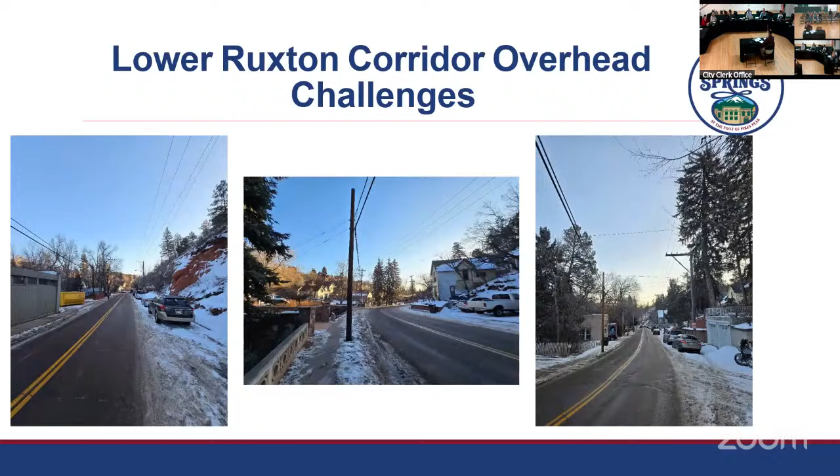The remaining slides touch on the same points that Andrew highlighted—this is the extent of the overhead that would have to really be dealt with, and it's really not the simplified process we'd all hope it would be. And lastly, this is the option that we feel, in discussions with Denise, we would recommend.

We feel it's got the largest return on investment in terms of what you can achieve in the area that you can achieve it in. And as we proceed with design, we would look for ways to reduce the cost to fit within the budgets.

There might be some opportunity to use other enterprise funding if you wanted to make other improvements. So instead of using CDOT funding to add the valves and fire hydrants, you could maybe use enterprise funds for that, maximizing the CDOT 4.8 million remaining and any other city costs. We'd seek additional funding as needed during design, and work with CSU on how we can best fit the sidewalk around the poles or relocate poles accordingly.

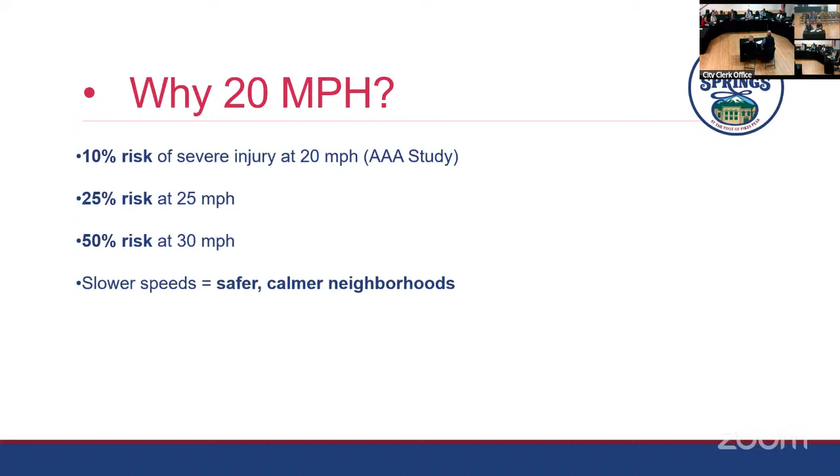All right, so why 20 miles per hour? Basically, there's a 10% risk of severe injury at 20 miles per hour, but it jumps up to 25% at 25 miles per hour. Once you hit 30 miles per hour, it's at 50% risk of severe injury and or death. So basically, slower speeds mean safer, calmer neighborhoods.

The current speed limit in city code is 25 for residential and 35 for non-residential for unposted sections. The proposal is residential unposted at 20 miles per hour, and non-residential would also be unposted at 20 miles per hour, unless otherwise posted. So we always have an option to go slower or faster.

Correct. Supporting evidence - Seattle and Portland did some studies, and there's been fewer fatalities after that was imposed. NACTO says lower speed means safer streets. That was the same presentation about complete streets brought to council, which we'll soon bring to the MAPS board to start looking at, and maybe bring that whole thing to council as well on what we want to adopt for the city. The Vision Zero is part of the strategy to reduce traffic deaths.

Some ideas behind this: the traditional approach is that traffic deaths will happen; the new vision is traffic deaths are preventable. The old traditional approach assumed perfect human behavior; the new one recognizes humans will fail, so we have to keep that in mind. The old approach was to prevent collisions; the new approach is to prevent fatal or severe collisions, and that's where speed comes in. Then individual responsibility was the traditional approach, and now it's a systems approach - how do we solve it that way? And saving lives being too expensive was the traditional approach; the new one is saving lives is not expensive, it's something we have to think about and do.

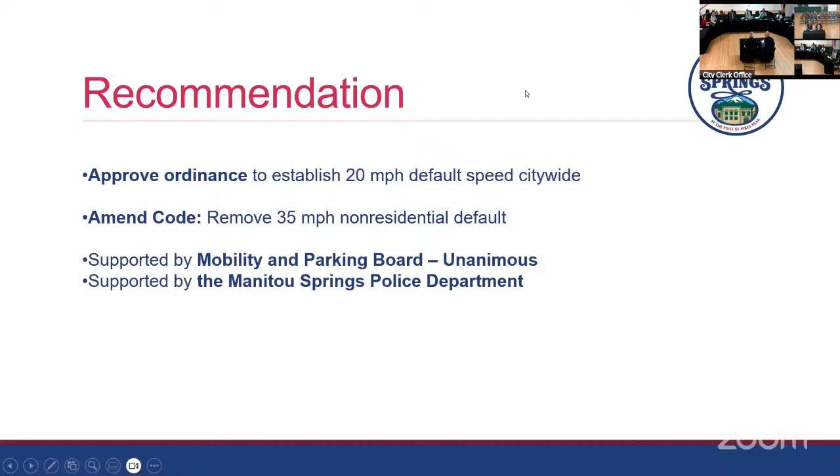You guys get the prize for the shortest presentation of the evening. Even the prize is you had to wait to be number 3. Okay, council, that brings us to council correspondence. Anybody have anything to report?

Nancy: I went to the DCI conference last week, my first time going, and I found it very beneficial—I'd highly recommend Denise goes next year. I learned a lot about brownfields and found out Manitou probably has a lot more brownfields than I could have imagined, and there's a lot of resources still available. We got federal and state presentations on it, and they anticipate the funding in that particular area will not go away under the new administration, so that was good news.

One of the big things I learned is that a lot of cities are now going to things Manitou has typically excelled in—specifically small stores, rather than bringing in a Costco. They split the lot up and make a yoga studio, an ice cream store, a boutique hotel, and so on, instead of making a huge development. Manitou has pretty much always done that, and additionally all the cities are really going to arts and creatives now to promote their economic development.